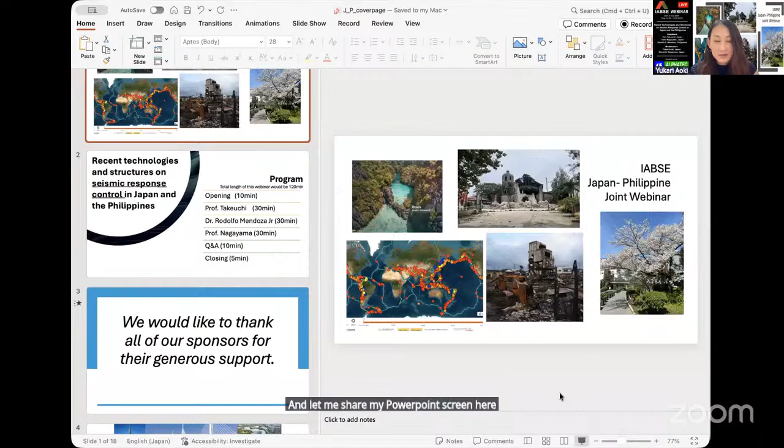Let me share my PowerPoint screen here. So very quickly, this is the joint webinar, and today's program actually has about 120 minutes. Now we are in the opening session and we have three beautiful speakers, Professor Takeuchi, Dr. Rodolfo, and Professor Nagayama. We may have a question and answers closing time.

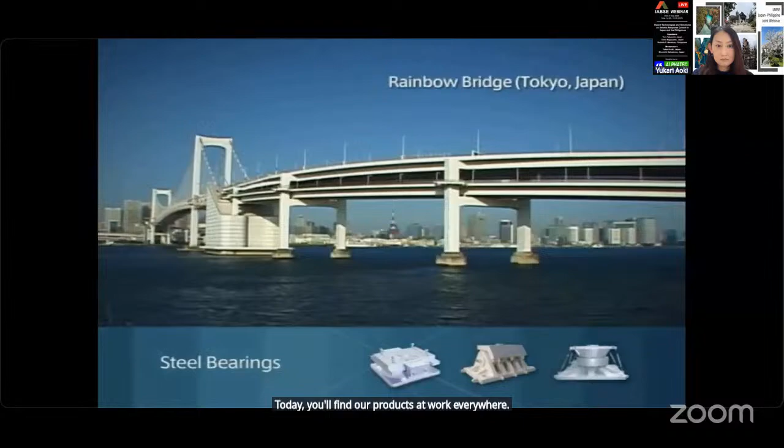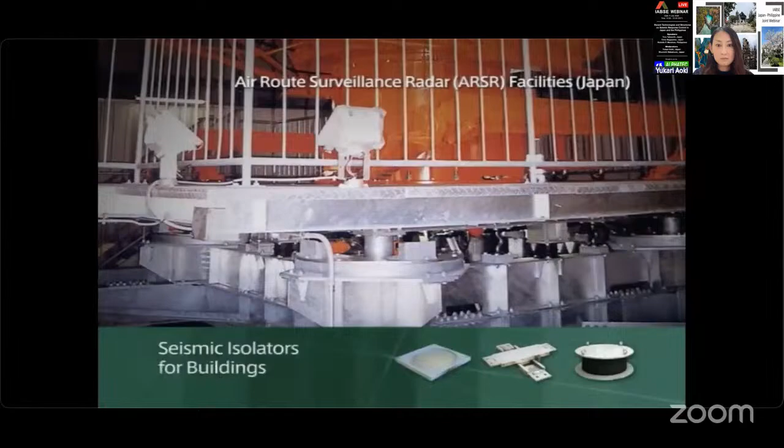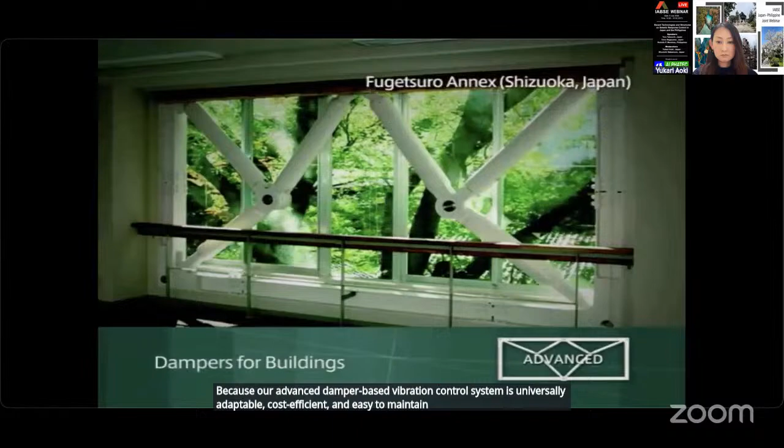Core-Tec is renowned for wide-ranging excellence in engineering. Our seismic isolation bearings and vibration control dampers play a vital role in all manner of buildings and bridges. By leading the way in casting and processing technologies, we've forged a history of more than 60 years. Today, you'll find our products at work everywhere, fueling pride in local landmarks and ensuring peace of mind throughout Japan and overseas. Today, Kawakin Core-Tec continues to serve the needs of changing times, developing ever more sophisticated technologies that bolster our reputation, such as seismic isolators for bridges and for buildings. By applying our advances, we also reinforce existing structures around the world, providing value-added solutions that equip achievements of the past with the strength to withstand the future. Because our advanced damper-based vibration control system is universally adaptable, cost-efficient, and easy to maintain, it's an extremely popular choice for installation in new and old buildings alike, and in public facilities such as schools and hospitals. Superior reliability of Kawakin Core-Tec product is underscored by rigorous testing. We employ material with real-world proportions to analyze seismic and other effects, and we apply our findings to the development of new products. We use the largest testing machines in Japan to guarantee the highest levels of product performance.

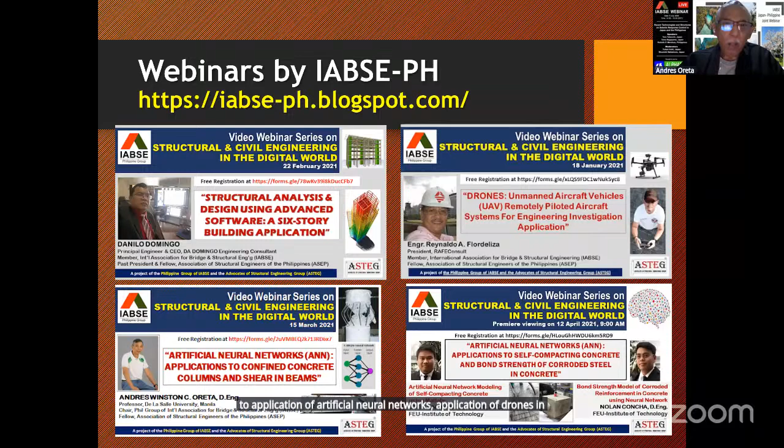So if you want to know more about the Philippine group of IABSE, you can visit the following site, where you can read updates about IABSE Philippines and watch the webinars which I presented earlier. Thank you very much for your attention.

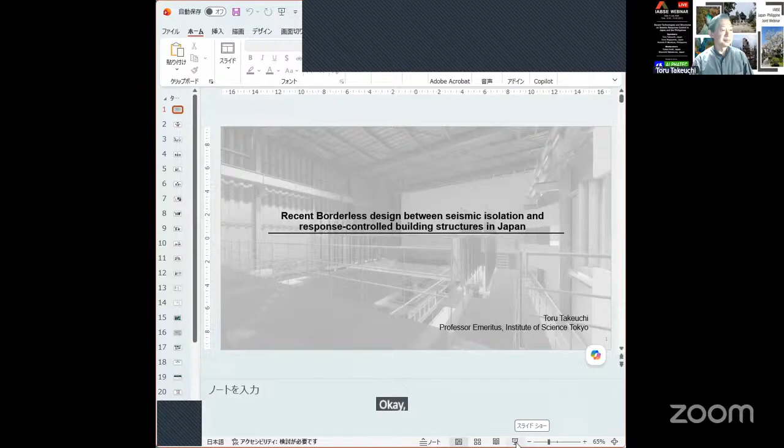I'm Toru Takeuchi from Japan. I'm a professor emeritus of Institute of Science Tokyo, previously at Tokyo Institute of Technology. I'd like to talk about the recent borderless design between seismic isolation and response controlled building structures in Japan.

Japan is a very high disaster country. We have big earthquakes, typhoons, floods, and also volcanoes. Behind me is a picture of the Noto Peninsula earthquake in 2024. We also have many earthquakes all over the world, and recently a big earthquake in South America, I think.

Because of this kind of disaster, seismic isolation and response controlled structures with energy dissipating devices or dampers have been widely applied to large numbers of buildings all over Japan over these 30 years, and they have been recognized as one of the ordinary structure options.

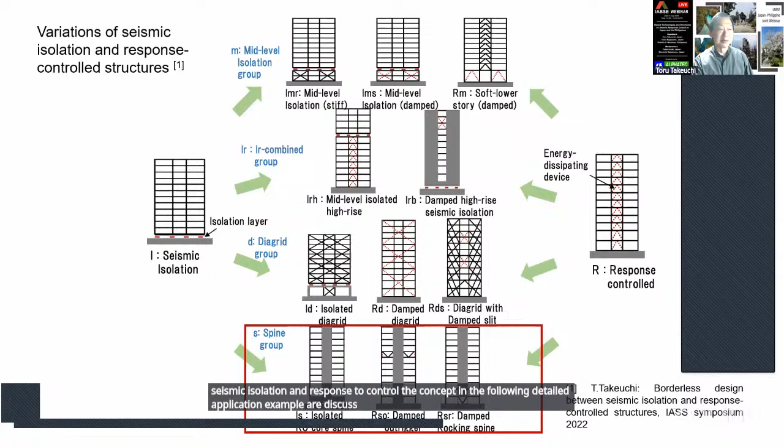In the following, detailed application examples are discussed with their characteristics. Firstly, this is an example of a mid-level seismic isolation system. These are increasingly being applied, especially in the very central Tokyo area, to avoid the loss of site use near the property boundary at the ground level and the risk of flooding.

There are two types: those in which the lower floors are designed to be rigid, like the left side in the Teco buildings, and those designed to be soft with viscous dampers, as in the Roppongi Tri 7 on the right.

In principle, the vibration control system with a soft first story is similar to seismic isolation, where the deformation is concentrated in the lower layers.

This Nippon TV Bancho Studio introduces a soft lower story with viscous dampers on top of the diagonals, achieving the seismic isolation effect without using seismic isolation bearings. Although such a system needs integrity at the deformation concentrated layers, seismic isolation pits are no longer necessary.

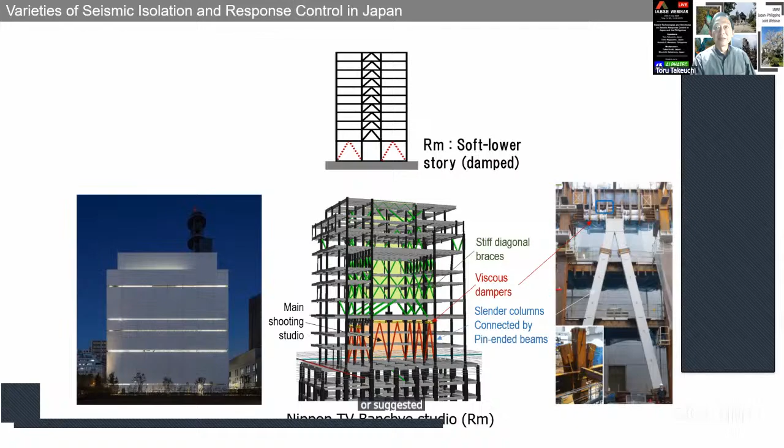This is a combination of the outer braced framed structure around the perimeter, called a diagrid or grid skin, combined with a seismic isolation system. The outer grid skin structure with diagonals increases the horizontal stiffness of the superstructure, so that is a good match for the seismic isolation system.

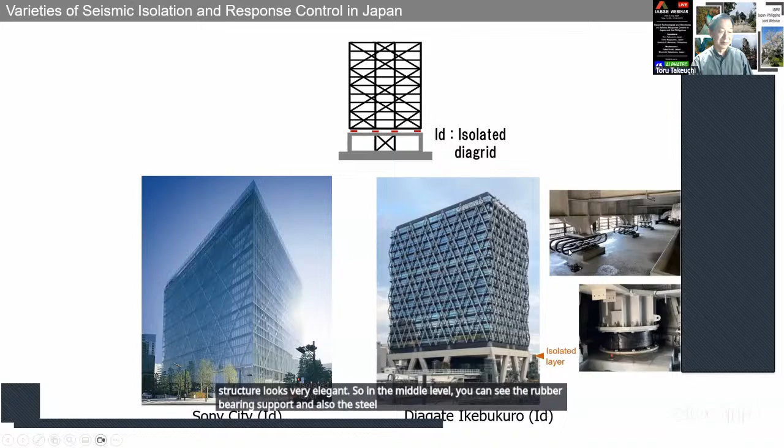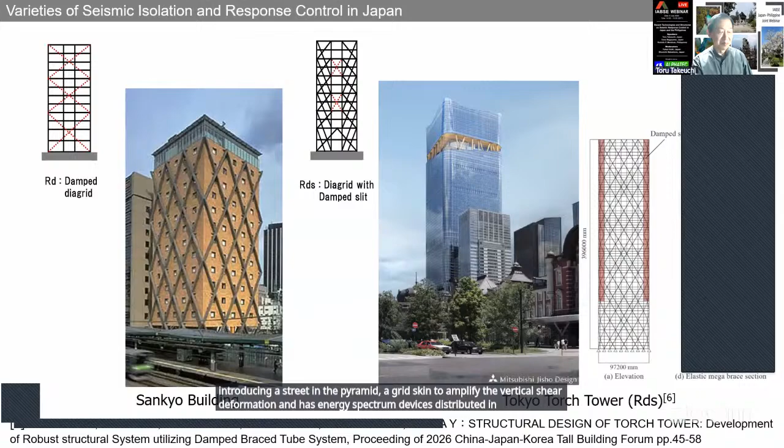On the other hand, National Stadium of Japan employed the energy dissipation system for the lower 3 layers of the supporting structure, similar in concept to Nippon TV Bancho Studio. So that is kind of a quasi-seismic isolated type.

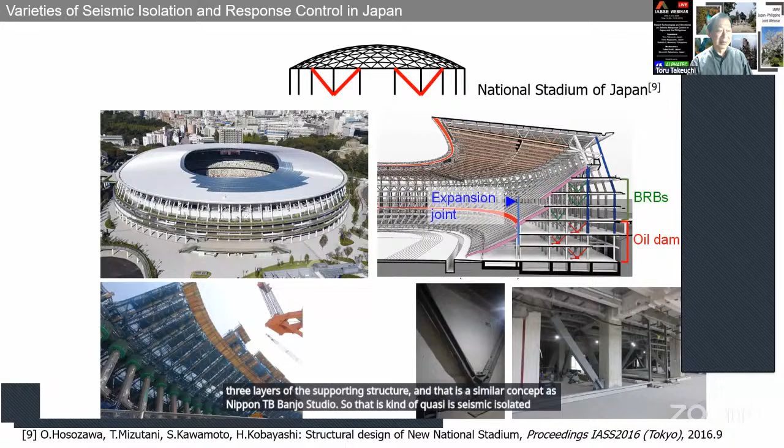Back to here is a detailed introduction to the Tokyo Torch Tower mentioned earlier. This building is currently under construction, but once completed it will stand 385 meters tall, making it the tallest building in Japan, with an extremely large floor plan of 100 meters by 100 meters.

It was determined that a damped outrigger was tried, but it was not functionally effective. Therefore, the plan is to adopt a braced tube structure to control the natural period to keep it under 7 seconds, and also incorporate vertical slits into the tube to amplify the shear deformation, and insert dampers into these slits to ensure high damping.

This is a plan and elevation of the building. The left figure shows the structure plan view, with a large plan of 100 meters by 100 meters. At the corners and center of each part, in 8 places of the plan, they have a slit, and in the slit, 4 or 3 layers of oil dampers are distributed. In each part, a large number of oil damping devices are distributed. These oil dampers enable the damping ratio to reach 10% or higher for the whole structure system.

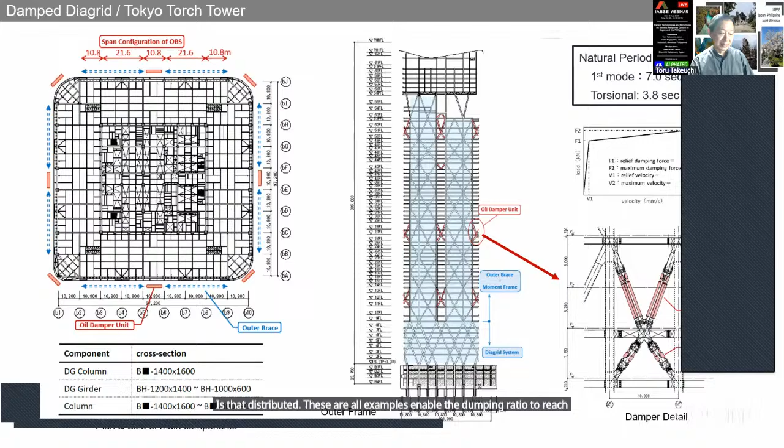This table shows the design criteria. The response has been evaluated for near-field earthquakes and long-period ground motion based on far-distance earthquakes, considering the Nankai Trough earthquake, and is limited to a response that allows continuous use even after such an earthquake, with interstory drift at 0.4%, or 1/250 radian, for the design earthquake. For the maximum considered earthquake, it is still under 1/150, that is 0.667%. So there is no harm to interior or curtain walls.

Here is the construction status as of June this year. Last month, you can see the massive diagrid constructed in the lower part, and in the slit you can see oil dampers of big 4,000 kilonewton capacity. 4 of those, and 8 of 2,000 kilonewton in the upper part were bundled together. You can see how massive the building is compared to other buildings. It's 100 meters by 100 meters, probably reaching over 4 times that length.

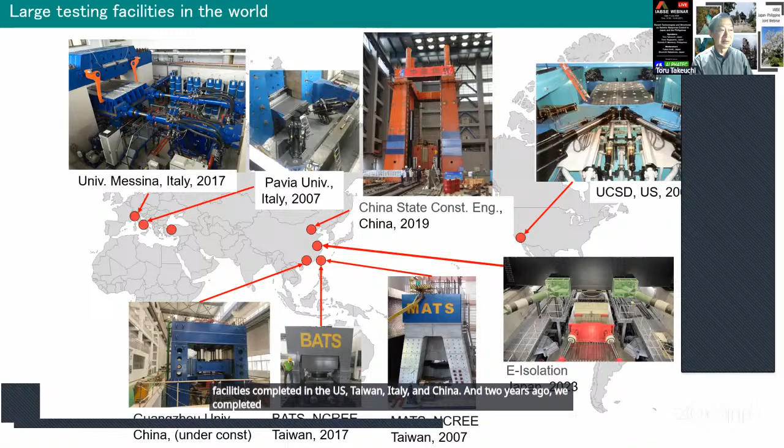In these facilities, the test specimen is compressed by applying a high vertical load from the bottom and received by the reaction beams through the moving platen. Here the specimen was compressed under a very high axial load, and the horizontal dynamic jack moves the platen horizontally. The reaction forces of the specimen are measured by this load cell.

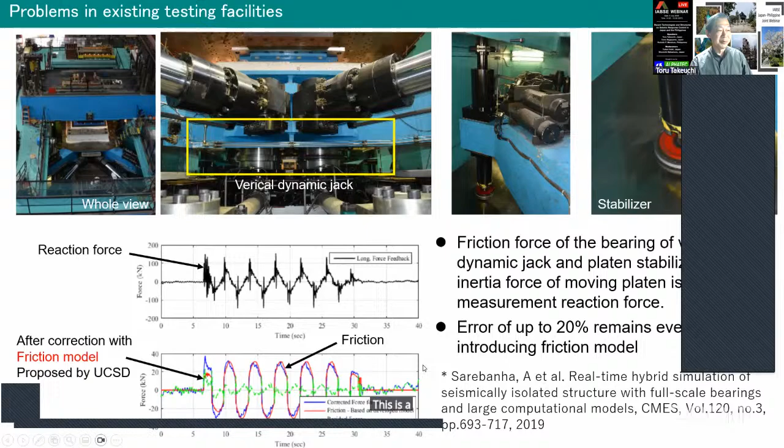But the problem is, even with a bearing of very smooth finish, under very high compressed load there is still friction introduced. Also, the moving platen is shaking dynamically, so inertia force is also introduced into the load cell. This load cell measures the specimen's shear force, but friction forces and inertia force can be contaminated into the measurement. This is a common problem, and in some testing times the error reaches 20% or more, which is very difficult to remove from the model.

So, in the new seismic isolation test facility in Japan, we are changing the concept.

The reaction beam is not fixed but supported by horizontally soft rubber bearings, and then connected rigidly to the reaction force measurement link, where the load cell is placed. This means when moving, the actual friction force is not transmitted here, and the inertial force doesn't affect it either because the reaction beam doesn't move up too much. So this load cell can correctly measure the shear force of the test specimen without contamination from friction or inertia forces.

This e-isolation new facility was completed in 2023 in Miki City, Hyogo Prefecture. That is Japan's largest experimental facility for seismic isolation and vibration control systems, capable of withstanding vertical loads of 30,000 kilonewtons, horizontal loads of 5,100 kilonewtons, and amplitude of 1.3 meters under 800 millimeter per second velocity.

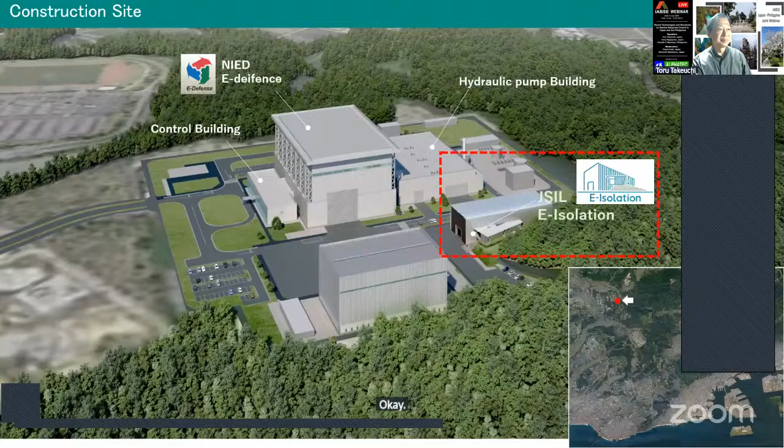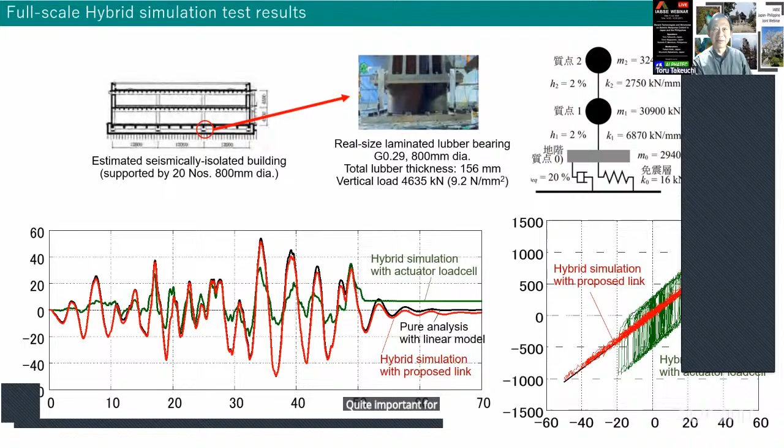The red line shows the hybrid simulation obtained with the proposed measurement link. It has very clear linear lines, and its response very precisely reproduces the pure analysis with a linear model. So this measurement system is quite important for real-time hybrid simulation.

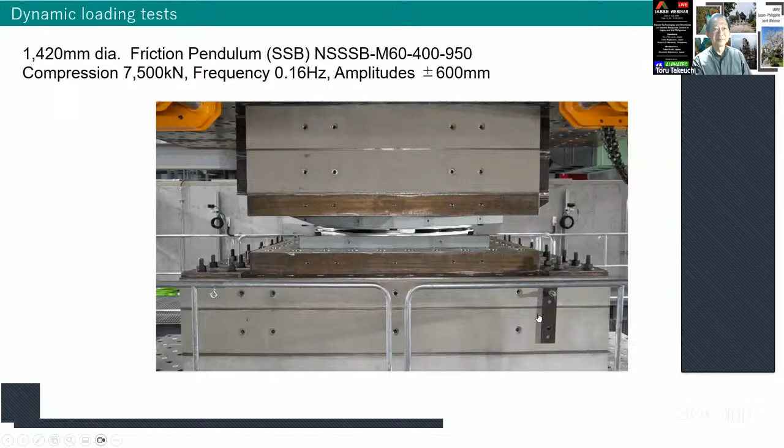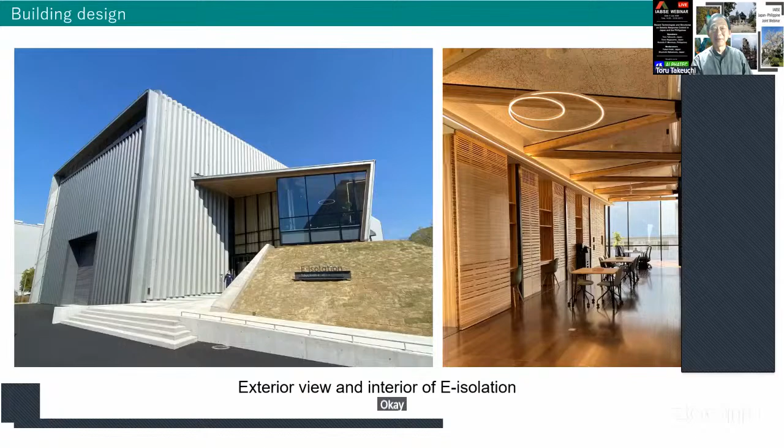If you have the time and budget for testing at this facility, please inform us for your seismic isolation or response-controlled structures project. Please check which specimens can be tested at e-isolation and join us in Miki City. Okay, that's my talk. Thank you very much for your kind attention.

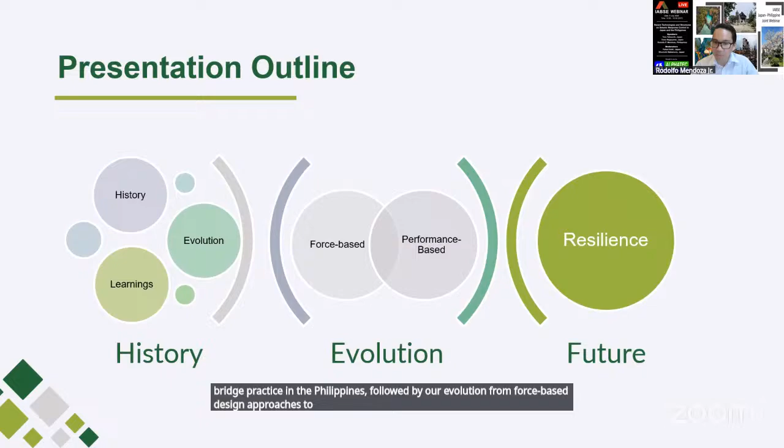My presentation outline for today: I would like to start with the history of bridge practice in the Philippines, followed by our evolution from force-based design approaches to current performance-based approaches, and our goal to achieve resilience-based design through the use of seismic isolation systems.

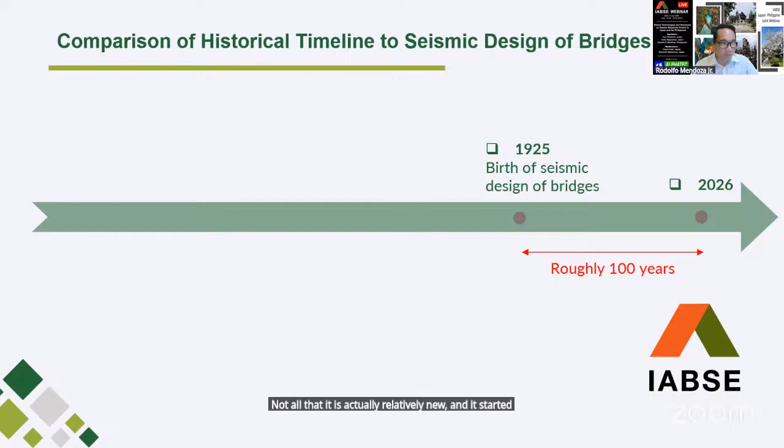The seismic design practice for bridges is not old; it is actually relatively new, starting around 1925 after the Kanto earthquake. That's just roughly 100 years from where we are right now - similar to the age of one of our prominent late senators in the Philippines who achieved 100 years old before his unfortunate demise in 2025.

We can say that seismic design practice for bridges is roughly the same age as the birth of IABSE in 1929. All of this is because of the event in Japan during the great 1923 Kanto earthquake. If you look at it, many other great achievements in both sciences and engineering were already achieved centuries before the introduction of seismic design in both buildings and bridges.

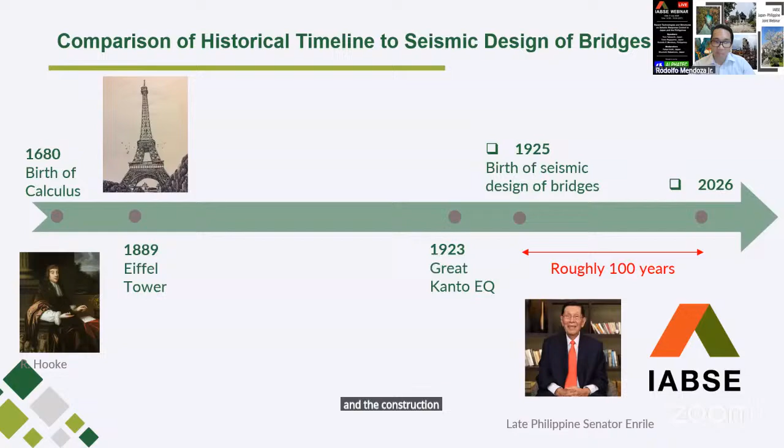The birth of calculus and the introduction of elasticity happened in the 17th century, and the construction of the Eiffel Tower happened around 1889. In the Philippines, one of the notable structures, the San Sebastian Basilica, was completed in 1891, almost the same time as the Eiffel Tower, years before the introduction of seismic design.

There is a common myth that San Sebastian Basilica was designed by Gustav Eiffel because they were constructed at the same time. But as an engineer who was involved in the restoration of the church, there is no actual evidence that it was Eiffel who designed the system.

However, due to the commonality in terms of steel technology, connection design, and the material used, which both came from Belgium, it is understandable to say that this San Sebastian Basilica was designed by Gustav Eiffel.

It was not until the 1908 Messina earthquake that the concept of considering ground motion in the design of buildings was considered, but not until 1915 did we have a formal definition on how we consider ground motions in the design of buildings, after Professor Sano of the University of Tokyo introduced the concept of seismic coefficient.

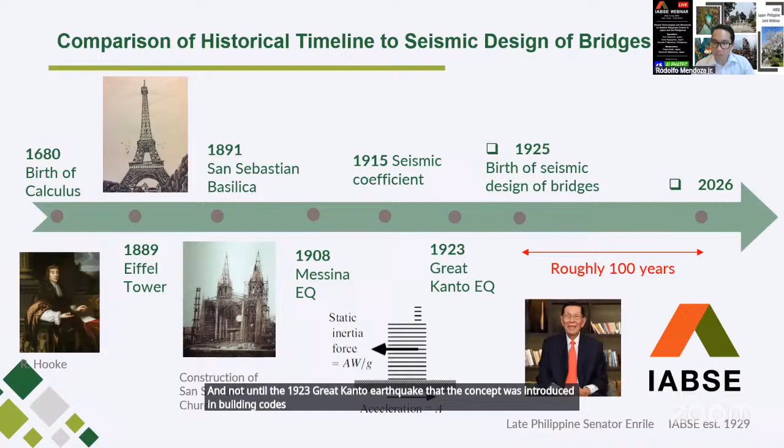And not until the 1923 Great Kanto earthquake was the concept introduced in building codes in 1924 and in bridges in 1925.

In the Philippines, the first bridge ever constructed is the Puente Grande de España Bridge, built between 1629 to 1630. The bridge consists of 10 spans, connecting Intramuros and what we now call the Binondo area. The structure originally had a superstructure made of timber, and the substructure was made of massive granite stone piers.

The bridge is said to have survived the 1645 and 1663 earthquakes, but was totally damaged during the 1863 earthquake, which was then replaced by the Puente de España Bridge in 1875.

This Puente de España Bridge is a 6-span stone masonry bridge following Spanish bridge design, consisting also of 2 central arches made of iron.

The iron is said to have been manufactured in France by a French company, Imbert and Company, and directly shipped to the Philippines. The bridge survived until its subsequent replacement in 1930s, when it was replaced under the American colonial era and named the Jones Bridge.

The Jones Bridge, as we know it, was designed by one of the first pensionados - engineers or architects from the Philippines who were sent to the US to study engineering and architecture. Juan Arellano, of course, is one of those people who was sent to Drexel University.

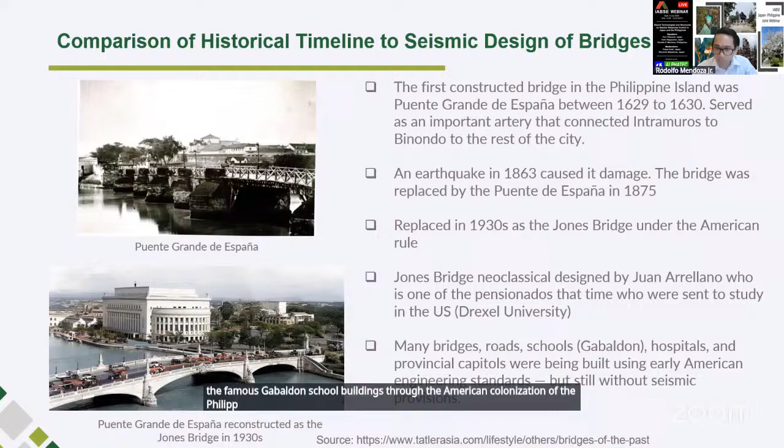It was also during this time that many roads and bridges were upgraded, including the famous Gabaldon School buildings, through the American colonization of the Philippines. But even up to this time, there was no account for seismic design or earthquake provisions in the design of these buildings.

1961 was the year the Association of Structural Engineers of the Philippines was established, and from there on, the consideration for seismic forces has been incorporated.

In 1982, DPWH required the design of bridges to consider at least 10% of gravity. This was followed by the release of the ASEP NSCP, or National Structural Code of the Philippines, Volume 2, dedicated for bridges, in 1987.

After the 1990 Luzon earthquake, DPWH released a department order requiring all bridges to conform to the latest AASHTO provisions, and later these provisions were adopted by ASEP under its Volume 2 in 1997.

From there, DPWH, together with the support of JICA, produced new standards, and the penultimate is the 2015 release of the DPWH DGCS, which updates all the guidelines for bridges, including standards for seismic provisions following the LRFD bridge seismic provisions, and also the introduction of seismic isolation guidelines.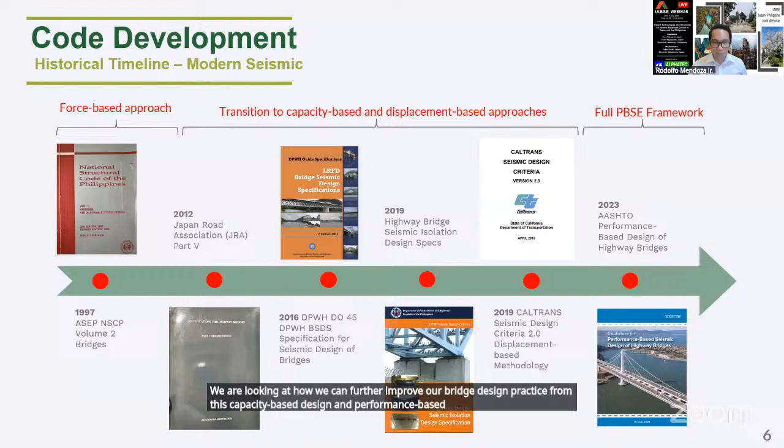The development of code in the Philippines transitioned from the original force-based design concept into capacity and displacement-based design approaches. Now we are looking at how we can further improve our bridge design practice from capacity-based and performance-based design to full resilience-based design approaches.

In the force-based design in the Philippines, the design of bridges identified the substructure as the main earthquake-resisting system, and a single ductility factor is used to represent the ductility of the entire system.

This concept is the same as that applied in the US for buildings and was also adopted for bridges in the Philippines. Clearly, there are some limitations with this approach, and this resulted in damages during the 1990 Luzon earthquake, including damage to foundations, soil liquefaction, unseating of superstructure, pier collapse, and deformation due to lack of ductility and insufficient seat width.

However, through the introduction of new standards, following learnings from the earthquakes, we adopted a combination of codes following both US and Japanese standards. The new DPWH standard for bridges has adopted both the AASHTO provisions and the provisions of the Japan Road Association in the design of bridges.

This provision still adopts the definition of R value as a system ductility factor for representing the substructure selected for a system, but this time we are introducing two levels of assessment for hazard levels. We have also adopted seismic performance requirements, mostly patterned from Japan Road Association guidelines, and introduced seismic verification, although mostly based on force-based design approaches.

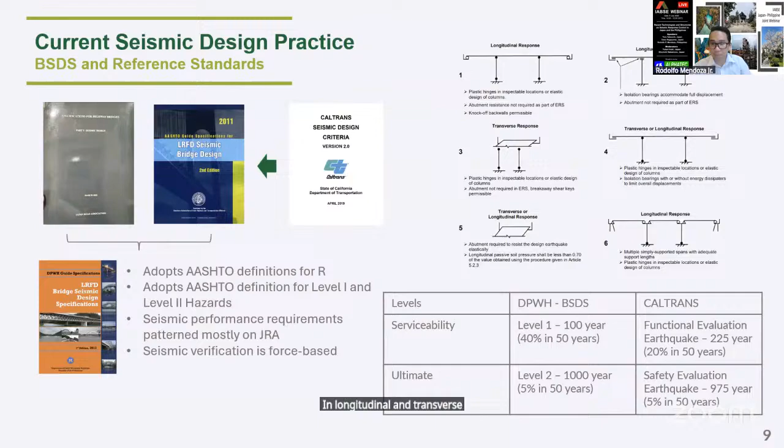Specifically, in the current BSDS manual of DPWH, there are particular sections that discuss solely the design of seismically isolated bridges. Now, to further encourage engineers on the use of seismic isolation for bridges, a highway bridge seismic isolation design manual and specification was further introduced.

This now allows us to use the seismic isolation layer as the primary system in absorbing earthquake demand, while still allowing secondary plastic behavior in piers and abutments. In this method, the fuse or main system used to absorb earthquake energy is the isolation layer, which absorbs demand forces from earthquakes and lengthens the period of the bridge, further minimizing seismic demand on the substructure.

If we compare the original approach in the Philippines with the current approach, using the ADRS, or acceleration displacement response spectrum, given a demand, conventionally we design the substructure for bridges as a very massive system to have capacity higher than demand. Through the introduction of capacity-based approaches, we introduced the concept of ductility and capacity-based design, where we can now design flexible and highly ductile structures.

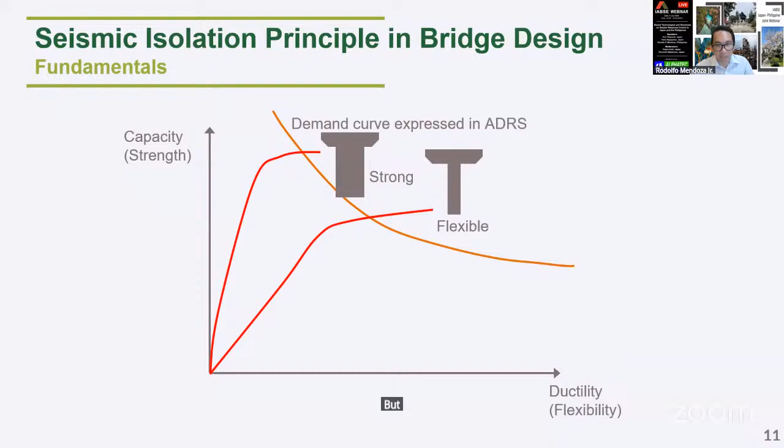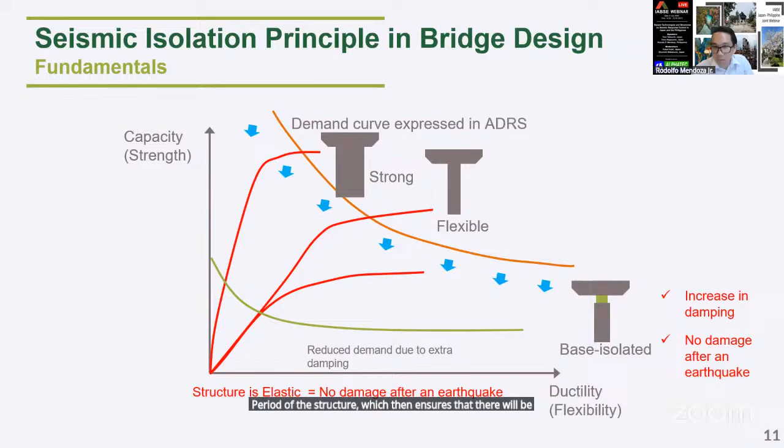But with the introduction of the seismic isolation system, we can reduce the demand on bridges by incorporating lead rubber bearings as well as dampers in the structure, which reduces demand by increasing damping and increasing the period of the structure, ensuring there will be no damage to substructures even after a major earthquake. Of course, there are some limitations in the use of seismic isolation in the Philippines, which are highlighted in the DPWH BSDS guideline.

For example, we are not allowed to use it on soft subsoil condition unless proven otherwise, if the bridge has a very long period, or if there is tension in the support reactions. Currently, our DPWH guidelines only support lead rubber bearing with plug and also high damping laminated bearing. The use of friction pendulum system is not yet covered by our guidelines.

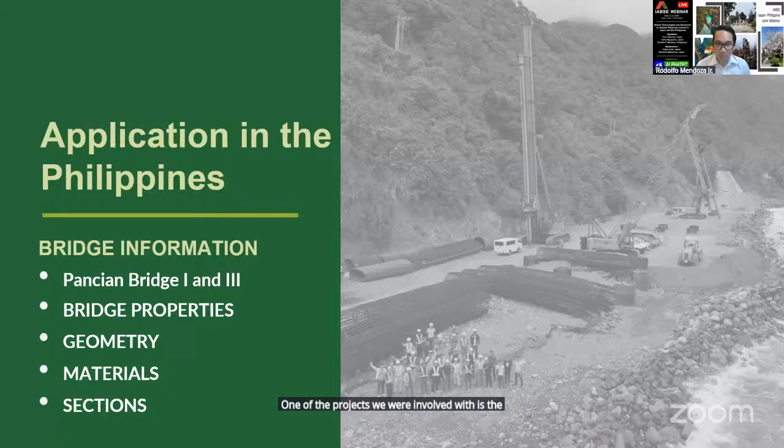To show you some application of the isolation system in the Philippines, one of the projects we were involved with is the construction of the proposed Pancian Viaduct. This consists of three bridges: Pancian Bridge 1, Pancian Bridge 2, and Pancian Bridge 3. The Pancian Viaduct is a project that connects the existing Patapat Viaduct along the Manila North Road in Ilocos Norte.

Pancian Bridge 1 consists of a total length of 496 meters, while Pancian Bridge 2 is a simply supported bridge with around 26.5 meters in length, and Pancian Bridge 3 has a total length of around 1.2 kilometers.

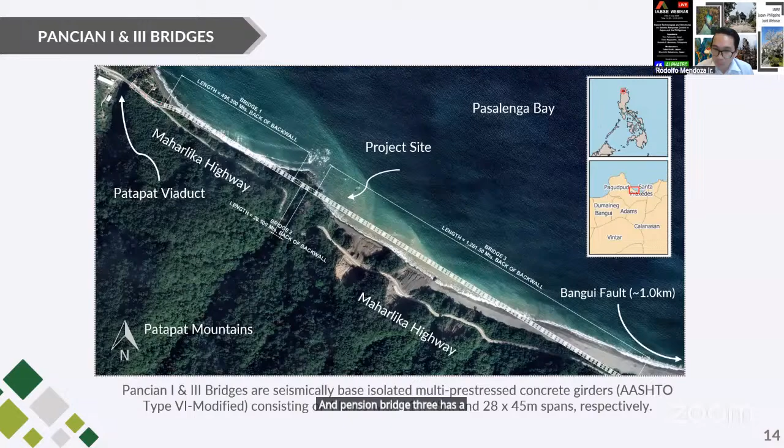Pancian Bridge 1 has a total of 11 45-meter spans. The superstructure is made up of pre-stressed concrete deck girders supported by single rectangular piers. The foundation sits on 6 2-meter diameter bored piles, and the superstructure consists of 7 AASHTO Type 6 modified girders. Each of these girders is supported by high damping rubber bearing with lead plug.

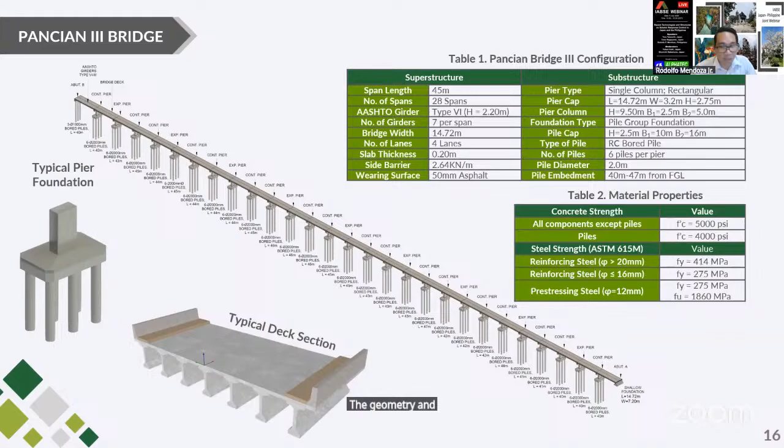Some details of the superstructure, substructure, as well as material properties adopted for this specific bridge are shown in this slide. Pancian Bridge 3 is a 1.2 kilometer viaduct, consisting of a total of 28 spans, each typically around 45 meters in length. The structure follows the same configuration as Pancian Bridge 1, including the geometry of the girders as well as the coping beams. The geometry and details of this bridge are again shown in this slide.

For these bridges, a site-specific seismic hazard assessment was conducted for the entire project to produce 2 levels of design earthquake. The PGA and spectral parameters, as shown in this slide, are provided for level 1 and level 2 earthquake. Level 1 is a 100-year earthquake, and level 2 earthquake is a 1,000-year earthquake.

Now, due to the proximity of this bridge to an existing fault, we were able to produce two types of level 2 earthquake, one that is normal to the fault and one that is parallel to the fault.

Using the generated spectra, we have extracted ground motion data from PEER NGA West 2, and utilizing this, we match those spectra from the site-specific record in order to generate ground motion records for nonlinear response history analysis.

Now, in the Philippines, under BSDS, you can carry out at least 3 ground motion records and take the maximum response from these 3 records as the basis of performance, or get the average of 7 ground motion records in each direction and use the mean value to evaluate the performance of the structure.

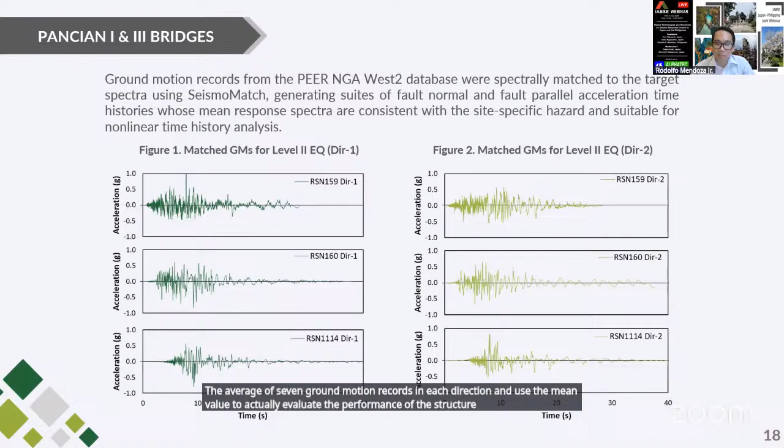Using these vertical reactions, we provide this information to the supplier of isolators, which then sizes and provides the parameters, including mechanical properties of isolators, which we will then use as input to our mathematical model. So this is an iterative approach, and we commonly exchange data until we achieve the target performance for the bridge.

This slide here shows you the assignment of the high damping rubber bearings on both Pancian 1 and Pancian 3, at expansion joint as well as continuous joint locations.

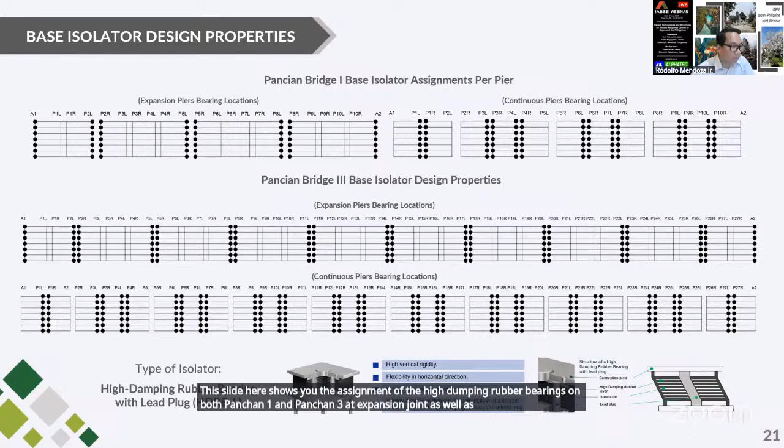Now, these parameters were used to model the bilinear response of the isolators, and the models represent some of the key mechanical properties of the isolation system, including the stiffness, the strength, and the energy dissipation. This process of modeling was iterative, and we refined it until the target bridge performance was actually achieved.

Using these parameters from the supplier, we then input them into our chosen software and mathematical model in order to confirm if the performance of the system matched the target performance.

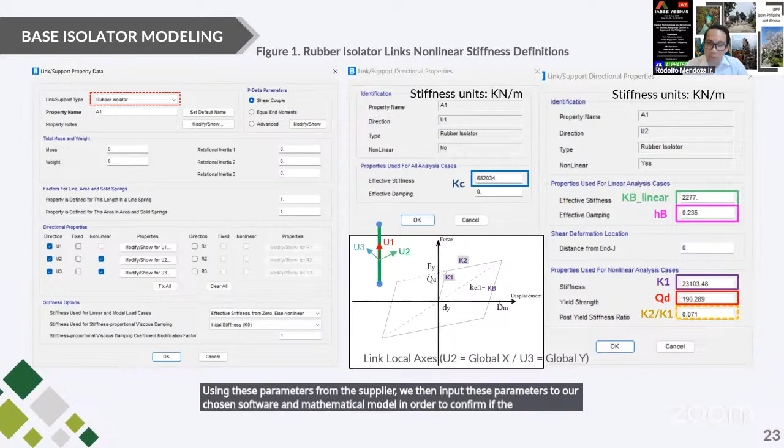For this viaduct, the bridges were classified as critical bridges, which required them to remain elastic under a level 1 earthquake and with limited damage under a level 2 earthquake. The seismic performance is the same as that of the Japanese standard, which measures performance in terms of 3 criteria: seismic safety design, seismic serviceability design, and seismic repairability design.

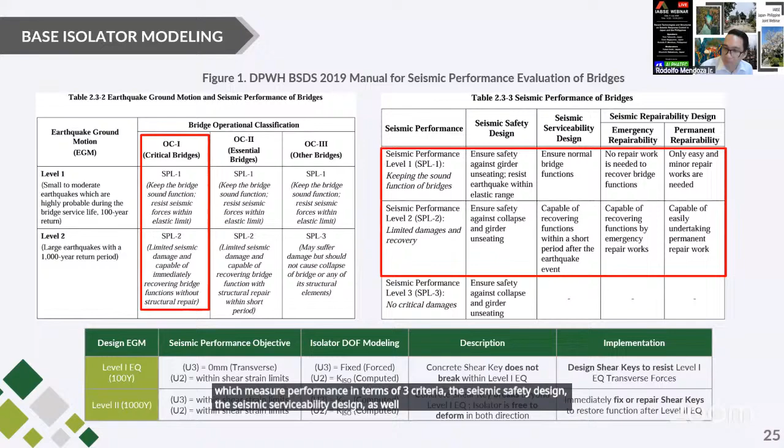This slide shows the articulation on the behavior of isolators under level 1 and level 2 earthquake. The concept is at level 1 earthquake, the isolator is expected to remain elastic, but it will move in the longitudinal direction, while it is fixed in the transverse direction. The fixity of the system in the transverse direction is provided by what we call shear keys, to prevent the system from moving in that direction.

At level 2 earthquake, however, the isolators are now allowed to move in both directions, longitudinal and transverse. Showing you here the articulation under level 1 and level 2 earthquake, including the specific seismic performance objective and how we have implemented this system, including the modeling of shear keys. Of course, wind demand was ensured to be less than the yield capacity of the isolation system.

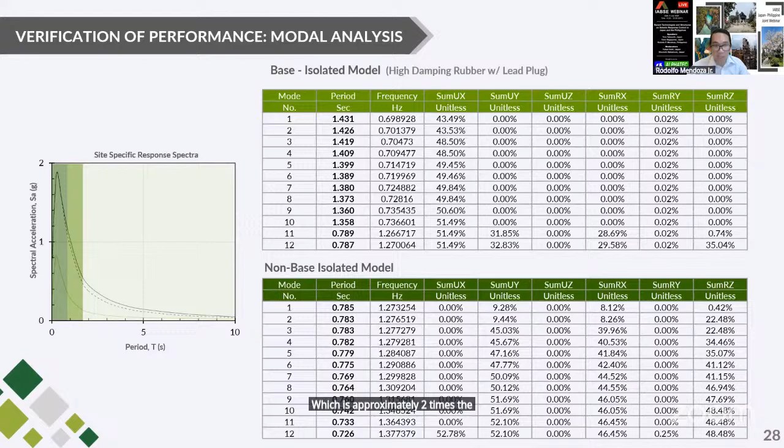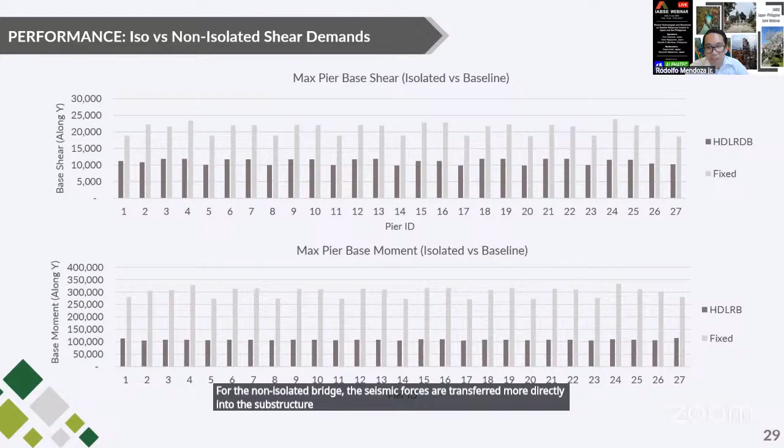This slide shows the comparison of the seismic shear demands between the non-isolated and the isolated bridge models, which clearly demonstrates the effectiveness of seismic isolation. For the non-isolated bridge, the seismic forces are transferred more directly into the substructure, resulting in higher shear demands at the piers as well as in the foundation. With seismic isolation, however, the flexibility and energy dissipation capacity of the isolation system reduce the transmission of seismic forces to the bridge substructure. As a result, the isolated bridge shows significantly lower shear demands compared to the non-isolated bridge.

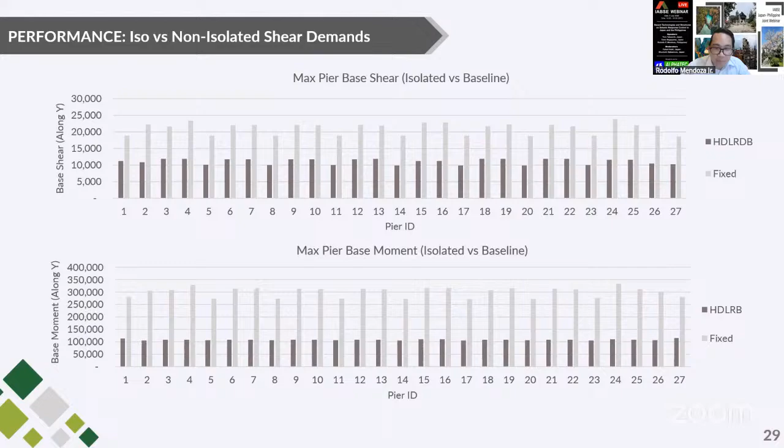To check the performance of the substructure, these two slides present the pushover curves for the critical pier shown earlier, both in the longitudinal and transverse directions. The curves are compared with displacement demands obtained from the nonlinear response analysis for level 1 and level 2 earthquake cases, considering both the non-isolated and isolated bridge models.

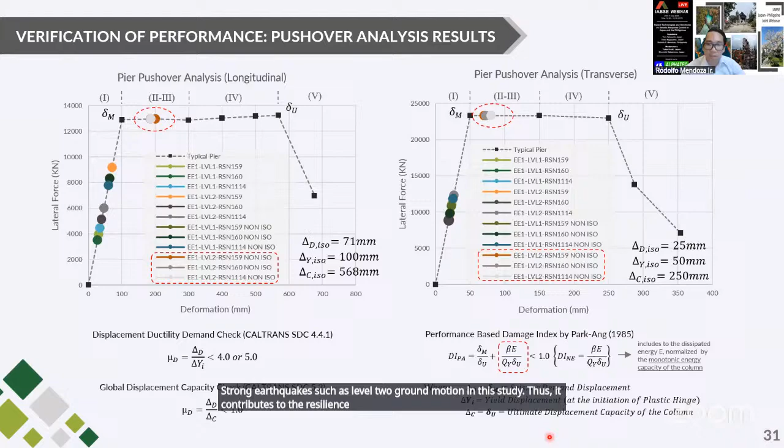In contrast, the isolated bridge model's displacement demand remained within the elastic range of the pier even under level 2 earthquake. This means no significant damage is expected in the substructures because of the effectiveness of seismic isolation. This comparison clearly highlights the effectiveness of seismic isolation in reducing demand on the substructure by shifting the main seismic deformation to the isolation system, allowing the bridge to remain elastic even during strong earthquakes such as level 2 ground motion in this study. Thus, it contributes to the resilience of the structure during earthquakes.

Aside from this case study, there are other bridges that have utilized seismic isolation, which has started gaining popularity here in the Philippines. For example, the Clarin Bridge in Bohol is also installed with a seismic isolation system, also from Japan, and has been installed with devices like dampers.

As concluding remarks, we can say that bridge seismic design practice in the Philippines has evolved far from conventional Spanish colonial era stone masonry bridges and force-based design approaches to the current performance-based framework that we have been adopting locally. Nowadays, the functionality of a bridge after a major earthquake is becoming a sought-after post-earthquake strategy for most of our bridges, and seismic isolation systems, when applicable, are considered a promising solution to address the functionality and predictability of bridges. Thank you for listening.

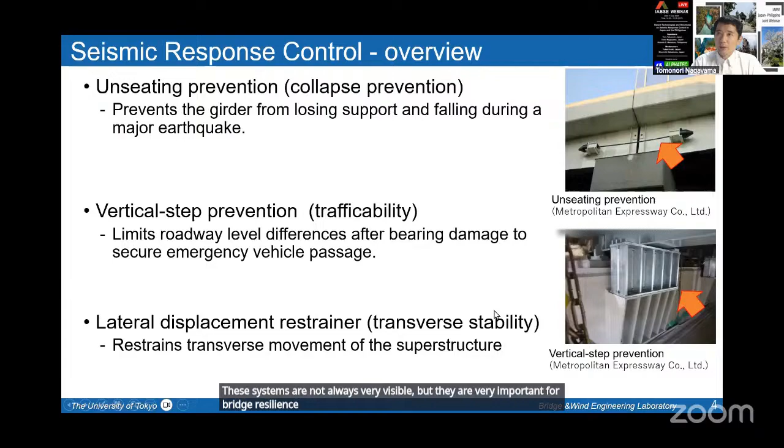This is one example of seismic resistant design for retrofit of BPA bearing plate type A bearing on the Metropolitan Expressway. BPA bearings suffered damage during past earthquakes. They were originally designed for level 1 earthquake, small to moderate earthquake, and partial bearing fall-off was observed. Replacing all of these bearings is costly and time-consuming, so an efficient and effective retrofit method was developed by Tokyo Metropolitan Expressway. The retrofit uses reinforcement blocks, steel rods, the existing bearing, and high-strength bolts. The basic idea is to improve the bearing capacity without replacing the existing bearings.

This slide shows the effect of the retrofit. After retrofit, the bearing capacity becomes much higher. The target level is increased from the level 1 small to medium earthquake demand to the much higher level 2 demand. And another important advantage is short installation time.

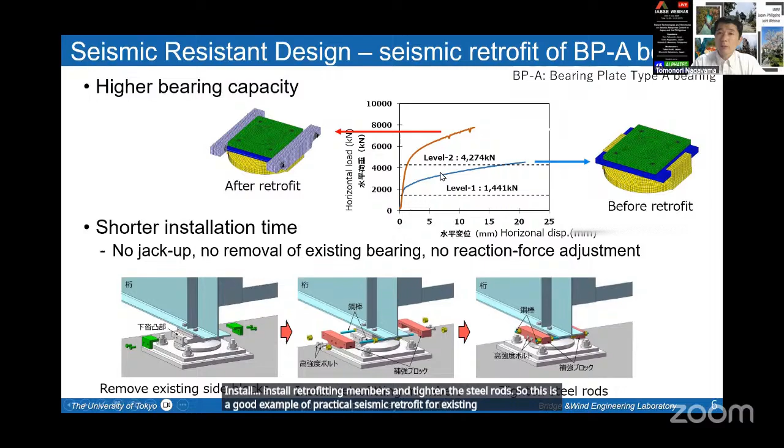Next, I will show an example of seismic control using a transverse displacement friction damper. In metropolitan areas, damage to the pier base should be avoided. This is because space around the pier base is often very limited, and damage assessment and repair are difficult for underground or congested components. So the concept here is to use bearings or devices that remain fixed under small to medium earthquake, level 1, but allow movement under large earthquakes.

Under level 1 earthquake, the device works as a restraining device. Under level 2 earthquake, large earthquake, it allows displacement and works as a damper. This slide explains the mechanism more clearly. Under level 1 earthquake, on the left, the small to moderate earthquake, the device prevents lateral movement of the girder. This helps protect the expansion joint and maintain normal serviceability.

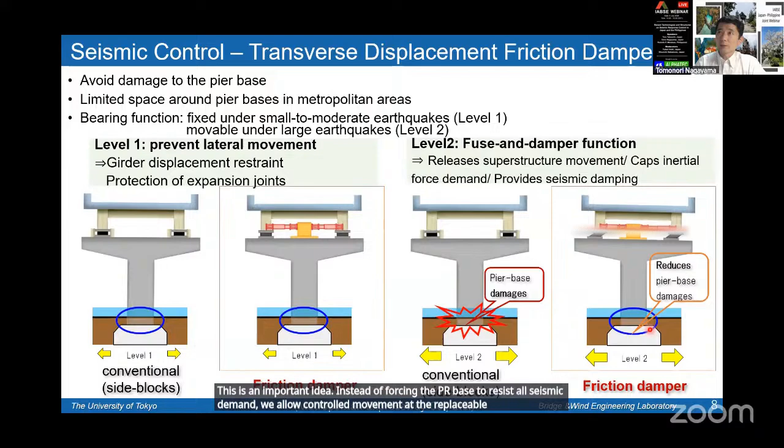This slide shows an application of the friction damper to an actual urban viaduct. Because of severe spacing constraints, the structural configuration is quite complex, and retrofitting the pier base is difficult. However, damage to the pier base should be avoided. So a transverse friction damper is an effective solution for this case because it controls seismic response at an accessible location and reduces the demand on the pier base. You can see the installed damper in this photo.

Now I would like to introduce the concept of functionally separated bearing systems. Conventional isolation bearings often concentrate many functions in one component. For example, they support vertical load, resist horizontal load, dissipate energy, accommodate displacement, and provide restoring forces. This is efficient if a single bearing has all functionalities, but it also creates a problem.

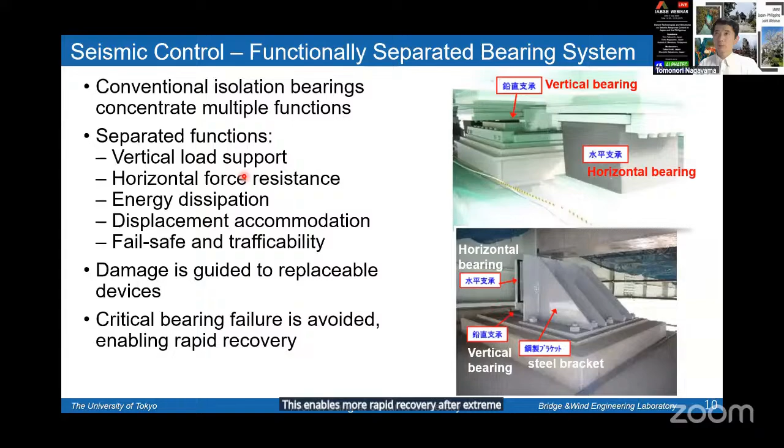This concept is further extended here as a functionally separated bridge system. The key idea is damage location control. Some components are difficult to inspect and repair, while others are easier to replace. Therefore, we intentionally guide damage to components that are accessible and replaceable.

One example is the cylinder and steel series damper, or CAS. It consists of a steel damper and a cylinder type damper connected in series. The cylinder damper accommodates slow movement, such as thermal deformation. This helps avoid unnecessary fatigue damage to the steel damper.

During a strong earthquake, level 2 earthquake, the velocity-dependent cylinder damper becomes relatively stiff, and the steel damper yields this part, dissipating seismic energy. Therefore, the system can accommodate daily movement, dissipate earthquake energy, and concentrate damage in a replaceable component.

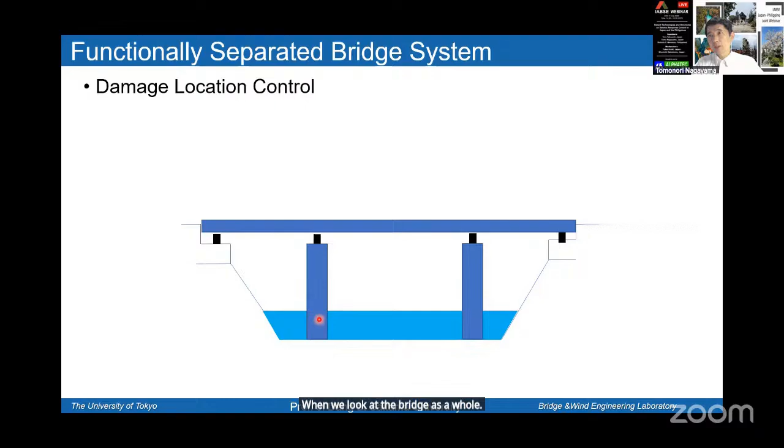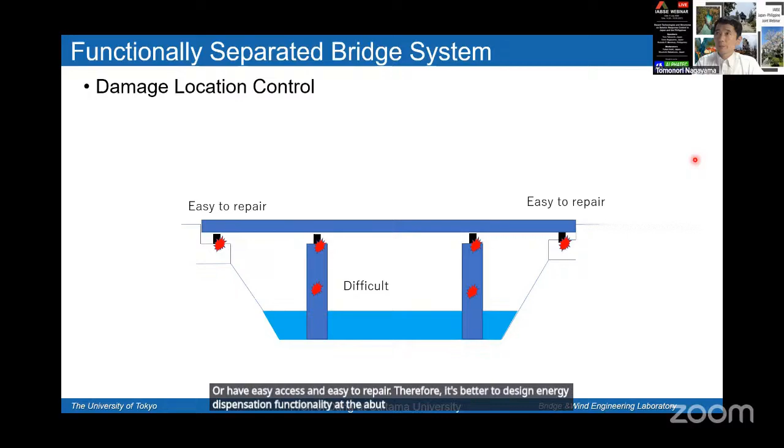When we look at the bridge as a whole, piers in the river are difficult to repair, while the bearing at the abutment has easy access and is easy to repair. Therefore, it's better to design energy dissipation functionality at the abutment bearings, so a cylinder and steel series damper is thus installed at the abutment. In short, the message is: separate functions, control damage, and recover quickly.

So far, I have discussed design concept and devices. However, a very important question still remains: do these systems really perform as intended during an earthquake? This slide shows a famous example.

The Onneto Bridge, a base isolated bridge, was investigated by Chaudhary, Abe, and Fujino. As many of you know, Professor Yozo Fujino sadly passed away on June 6th this year, and I'd like to take this opportunity to express my sincere respect and gratitude for his tremendous contribution to our field.

Here in this monitoring data, we revealed a typical seismic response. The girder and pier cap moved almost together. Two lines are very close with each other with negligible relative displacement. This means that at the instrumented piers, the isolation bearings did not allow the intended relative displacement. The likely reason was that a side stopper obstructed the movement of the isolation bearing.

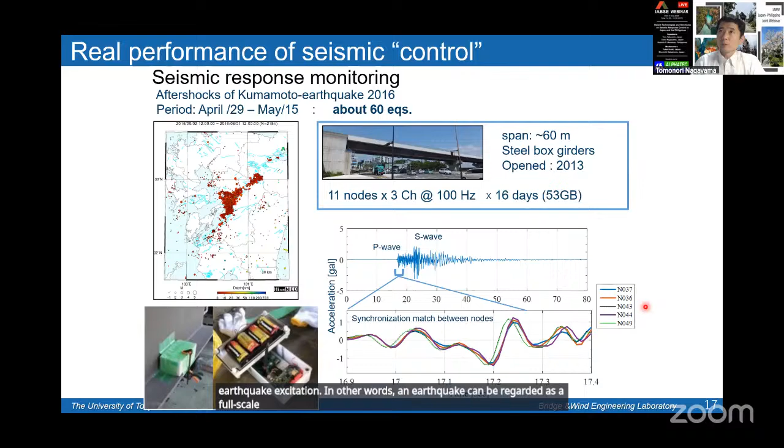From the monitored seismic responses, we can estimate not only global response, but also structural properties of components. Here, relative displacement response of rubber bearings was obtained from acceleration measurement. Using these responses, the stiffness of rubber bearings was estimated. The estimated stiffness differed from factory test results by only about 10%.

This is important because rubber bearings may degrade relatively quickly compared with many other bearing components. Monitoring allows us to evaluate the structural properties under actual service conditions. Bridge monitoring under real earthquake conditions is becoming increasingly important.

In Japan, the National Institute for Land and Infrastructure Management under the Ministry of Land, Infrastructure, Transport, and Tourism has installed strong motion monitoring systems on 25 road bridges of various structural types. This slide may be a bit outdated, so now we may have more bridges instrumented with this system. Anyway, the data helps validate seismic design assumptions.

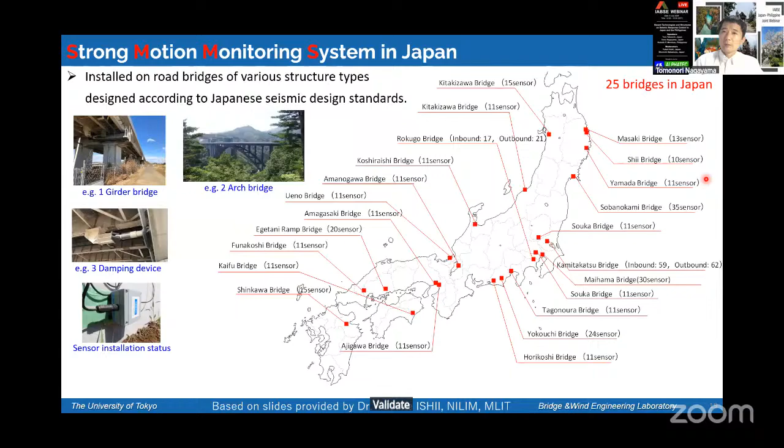Now, I will show an example from Yokohama Bay Bridge. Yokohama Bay Bridge is a long-span cable-stayed bridge and is an important transportation link. Understanding its seismic behavior is therefore very important.

During the 2011 Tohoku earthquake, transverse pounding was observed between the wind tongue and wind shear, which are important seismic response control devices for long-span bridges. This wind shear and wind tongue restrain the motion at the tower link.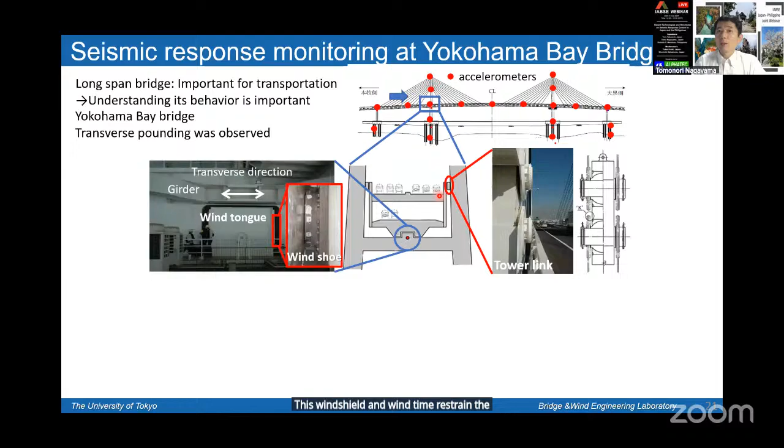The lateral displacement and lateral direction acceleration recorded show periodic impulsive responses. So these spikes indicate pounding. This phenomenon was not recognized before the earthquake and was not considered in the design.

The observed pounding may have serious consequences. If the wind tongue or wind shoe is damaged, the damage can propagate to other components such as tower link, cables, and girders. Actually, minor damage was observed at the tower link during the 2011 earthquake.

In the design, the wind tongue and wind shoe were assumed to move together without pounding. However, the monitoring data showed that pounding occurred in a transverse direction, which is different from the design assumption, and this phenomena is being further studied.

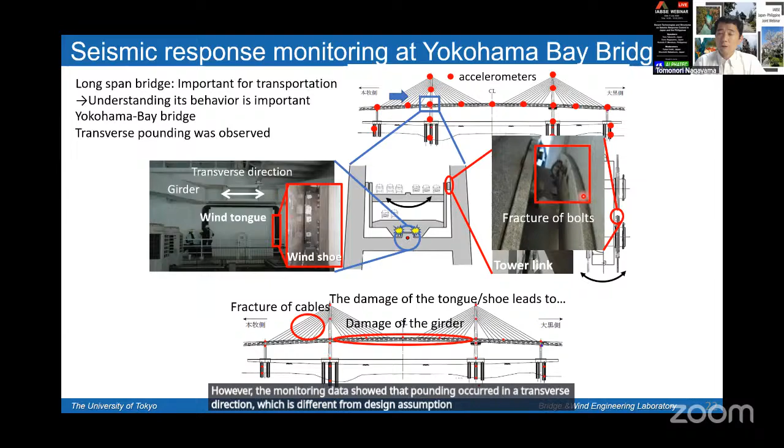If we consider nonlinearity, usually the frequency should decrease at the beginning during large motion and then increase. But here the frequency actually increased. This is very much different from the design assumption and our understanding.

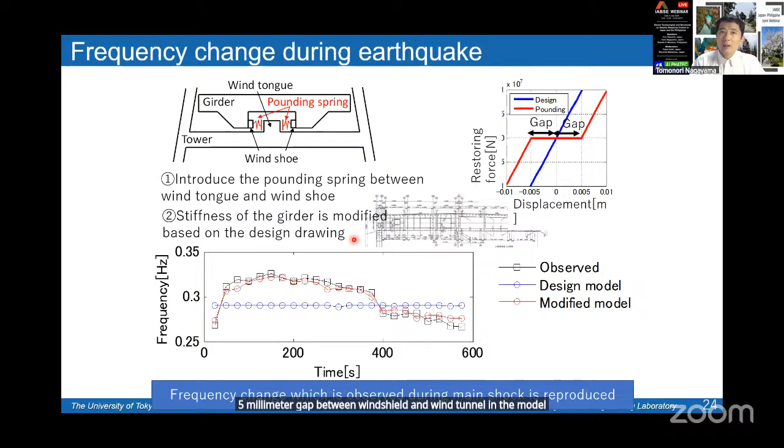We then included a small 5 millimeter gap between wind shoe and wind tongue in the model. Then we were able to reproduce the frequency change. With this model, the acceleration time history and the frequency spectrum are very well reproduced.

Yes, the time history shows good agreement. Then with the 5 millimeter gap, detailed FEM around the wind shoe and wind tongue were prepared with a shell element, and a multi-scale model was constructed. This model allows us to evaluate local deformation and possible damage under seismic excitation.

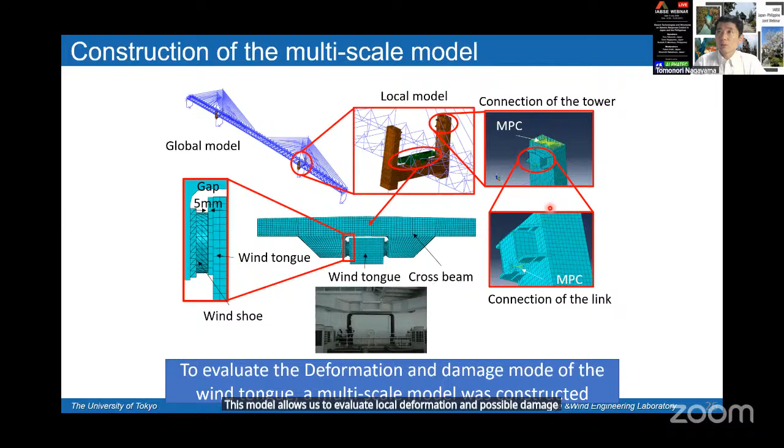Using this model, consistent with the observation, a level 2 design earthquake was applied. The analysis showed that the base part of the wind tongue yielded, and the gap increased due to pounding. This indicates that repeated pounding can cause local plastic deformation and damage.

The key point is that the monitoring data helped us identify the real mechanism, and the validated model helped us evaluate possible damage under extreme events.

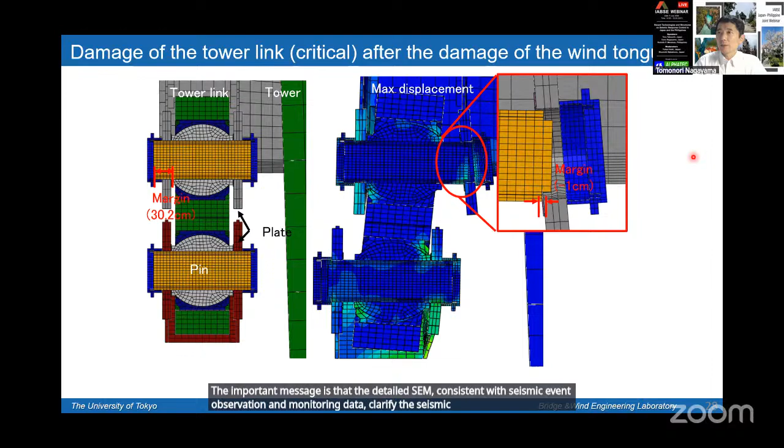The important message is that detailed FEM, consistent with seismic event observation and monitoring data, clarify the seismic performance under extreme events. So far, we have discussed monitoring for understanding real behavior and validating models.

The next step is post-earthquake rapid assessment. Rapid assessment is essential after earthquakes. For moderate earthquakes, it helps reduce downtime and economic loss. For severe earthquakes, it supports emergency response.

For structural damage, displacement is a key indicator. For example, interstory drift in buildings or relative displacement in bridge components is closely related to damage. However, displacement estimation from acceleration is difficult, especially in the nonlinear range. Double integration may work in the linear range with appropriate filtering, but nonlinear and residual displacement estimation remains challenging.

To address this problem, we have studied deep learning-based displacement estimation. Here we use dilated CNN. The advantage of dilated convolution is that it can have a wide temporal receptive field. It can efficiently capture long-range temporal information without using an excessively deep network.

The input is ground acceleration and absolute acceleration responses, and the output is relative displacement response. The model is trained using diverse nonlinear single degree of freedom systems with different hysteresis models. The aim is to estimate nonlinear and residual displacement from acceleration records.

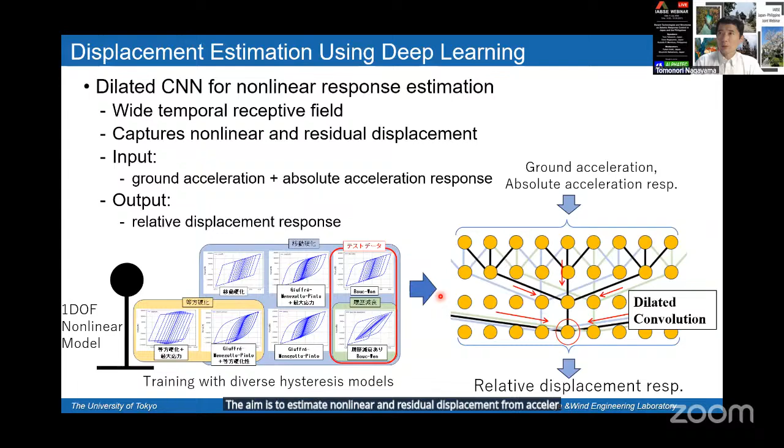The trained model was validated using a nonlinear Abaqus FEM model. Two structures with different damping ratio, natural period, and hysteretic behavior were considered. The result shows that the nonlinear displacement response can be estimated from acceleration responses, even for FEM models that were different from the training single degree of freedom models. This suggests the potential of data-driven displacement estimation for rapid post-earthquake assessment.

Despite model simplification, displacement was estimated accurately, with 1 to 10% error laterally and less than 2.5% longitudinally. This shows the potential of acceleration-based displacement estimation for bridge-level post-earthquake assessment.

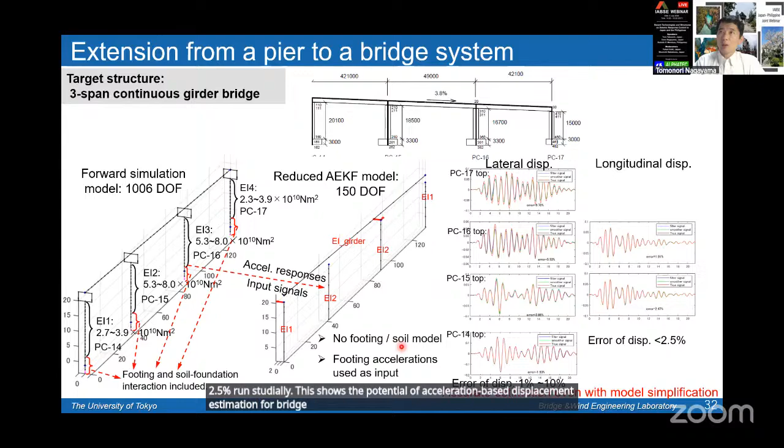To conclude, I'd like to emphasize three messages. Japan has developed diverse seismic technologies for bridges, from seismic resistance, isolation control, fail-safe, and trafficability measures.

Monitoring informed assessment is essential because real bridge behavior may differ from design assumptions. Monitoring helps identify hidden mechanisms and validate seismic performance. Finally, acceleration-based parameter and displacement estimation can support rapid post-earthquake assessment.

The next step is application to more complex bridges and nonlinear damage scenarios.

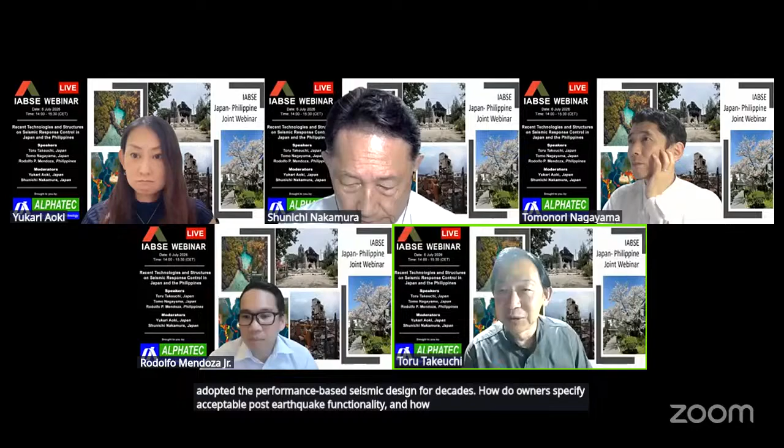The final question: Japan has adopted performance-based seismic design for decades. How do owners specify acceptable post-earthquake functionality, and how does that influence the choice of isolation or damping systems? That's also a nice question.

Recently, seismic isolation or response control might be a little more expensive than ordinary seismic design options, but recent earthquake experience has led more property owners to become conscious about business continuity after an earthquake and probable maximum loss, the PML. So there's more understanding among owners for the worth of seismic isolation or response control.

Also, this month, the Japan Structural Consultants Association, JSCA, launched a third-party seismic ratings certification service, rating from platinum to gold, silver, and bronze—four grades beyond the required design code, similar to the REDi rating system on the west coast of the US. So probably these services will help higher performance-based design gain popularity among building owners, I hope. That's my answer.